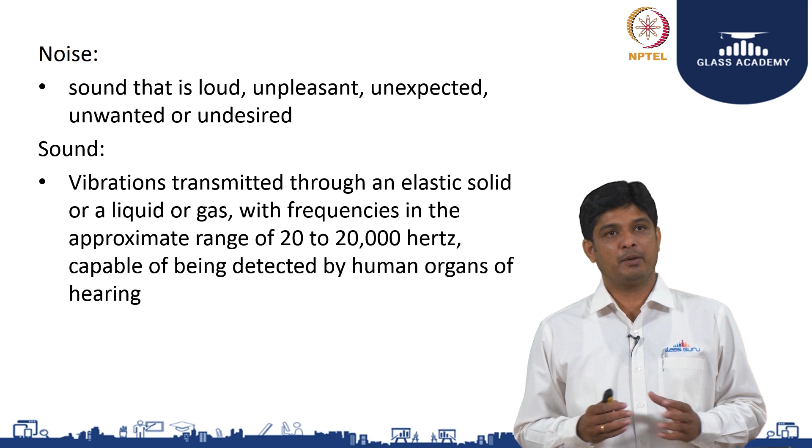What is noise? Sound that is loud, unpleasant, unexpected, unwanted or undesired, that is called noise. What is called sound? Vibrations that are transmitted through an elastic solid or a liquid or a gas with a frequency of approximate range 20 to 20,000 hertz and capable of being detected by human organs of hearing.

So, why decibel is a very important question to be understood, because our human ear is an amazing system. The threshold of hearing for a human ear is about 20 micropascal, whereas the threshold of pain is 20 Pascal. If you convert it to a frequency, 20 Pascal is approximately at 1000 hertz frequency.

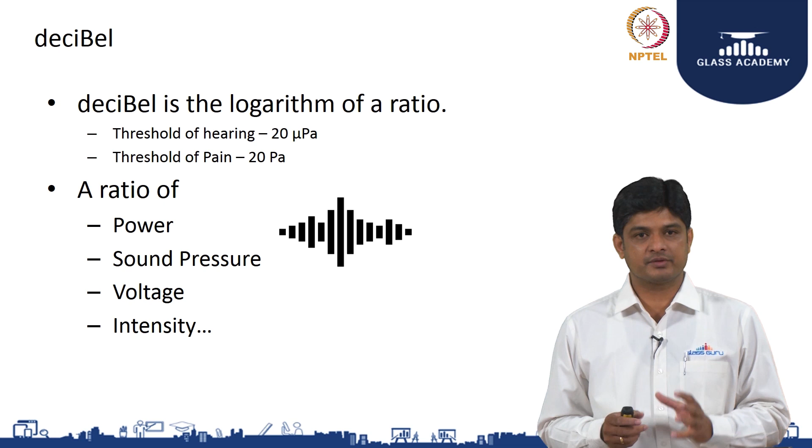What is called decibel? It is a ratio of the power, the frequency that is going to hit, the pressure, the intensity and the voltage. The ratio of all is measured by an individual number called decibel.

So, when you have a source, you have a huge range of intensity, which is the loudness, and there is a medium it is going to transfer through, and then there is a pitch, which is called the frequency pitch. There are low frequency and high frequency pitches which are going to reach you. So, this three combination is going to decide whether it is going to be a pleasant noise or a disturbance. So, there is a frequency difference when you see silent versus noisy; the way it reaches you with the intensity is going to have an impact on your ears.

Commonly, how much you can withstand, or where you can have what kind of level of noise: anywhere in a living space you can be at less than 40 dB, which includes your living and sleeping. Sleeping is usually suggested to be less than 35 dB. A working station or business office can be even up to 60 to 65 dB. Anything more than 80 dB you call a noisy environment, anything more than 100 plus will be really a disturbance, and more than 120 it can become unbearable.

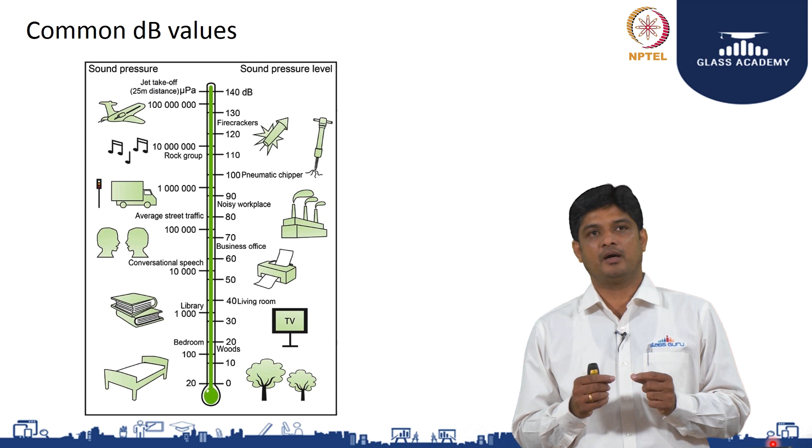That is where, if you connect it to my myth, even a 1 dB reduction at this scale is going to be a huge reduction, because after 40 to 45 dB, the impact of noise at every 1 dB will be double, which you cannot bear. So, the level of what is bearable versus not bearable is hardly 1 dB difference.

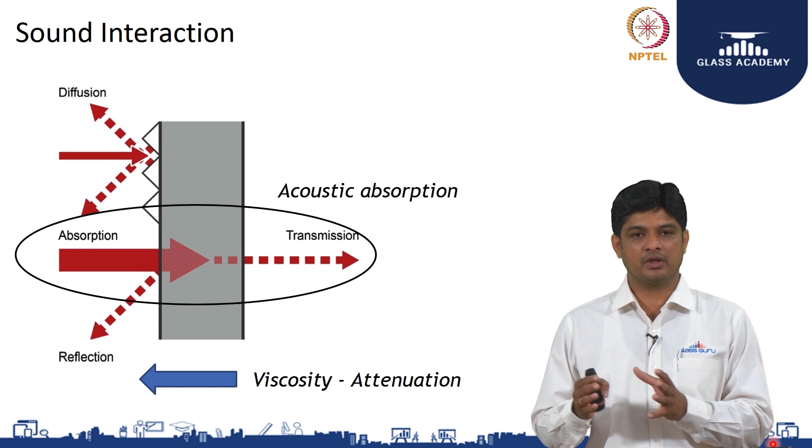So, how does the sound interact? The sound interacts when a source is going to hit an element or an object or a layer. So, part is going to get transferred, part is going to be reflected, part is going to get diffused, which is because of the surface of the medium it is going to hit, and all this can happen based on the mass of your material, because mass relates to the frequency filtration process. So, when you come to glass and acoustics, you have to be very clear on two important factors, which are called Rw and STC.

STC is called sound transmission class, whereas RW is called weighted sound reduction index. In both, when you want to measure and plot, both have a very similar methodology. The basic difference is the frequency range and the standard contour graph which we are going to plot. There is a difference in that. When you measure STC, you measure as per ASTM E413. When you go to RW, you measure as per ISO 717.

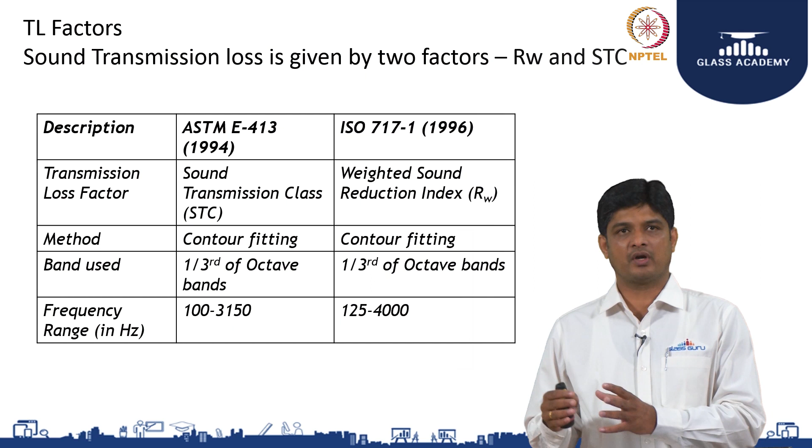Plus, the frequency range for STC is around 100 to 3150, whereas for RW it is about 125 to 4000 Hertz. What is called RW? It is a weighted sound reduction. It is a simple, single value index which is measured in decibels. As we understood, whatever we receive from the source to the observer side, we measure with a single value index called decibel.

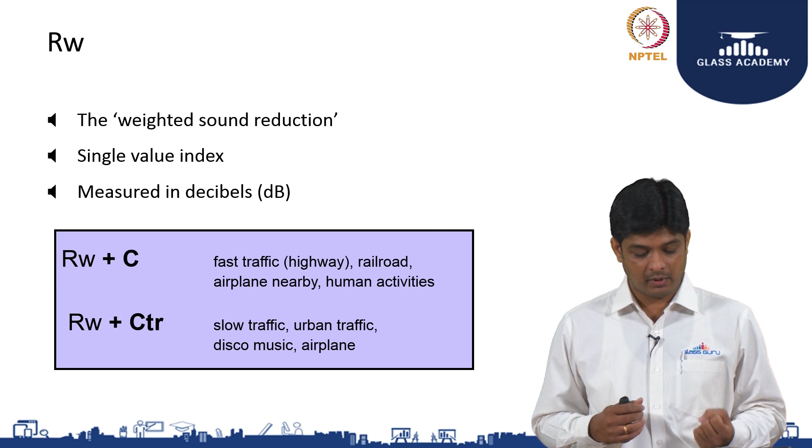In case of a building, when you have a value, whether it is RW or even an STC, specifically in case of an RW, we need to be very careful based on the type of source. Based on the type of source, you have to have adjustment factors, which are nothing but RW+C or RW+Ctr. C is an adjustment factor which relates to very fast high traffic, railways or airplanes, where the pitch is very high, whereas slow traffic, vehicle movement, general public disturbances or different music come under Ctr.

To make it clear, if you take ISO 717, it clearly gives a table of what adjustment factor you have to use to achieve your RW inside a building based on the type of source. For example, if children are playing outside, you have to take your RW value and apply your C adjustment factor to it. That will be your final achievable noise inside your building coming from the source.

So based on the different sources, whether it is children, domestic, discotheque music, different types of road traffic, slow or high, road or airways, or what kind of disturbance comes from an industry. So this is very important to understand. There is something called RW and there are adjustment factors called C and Ctr, which are very specific to internal application.

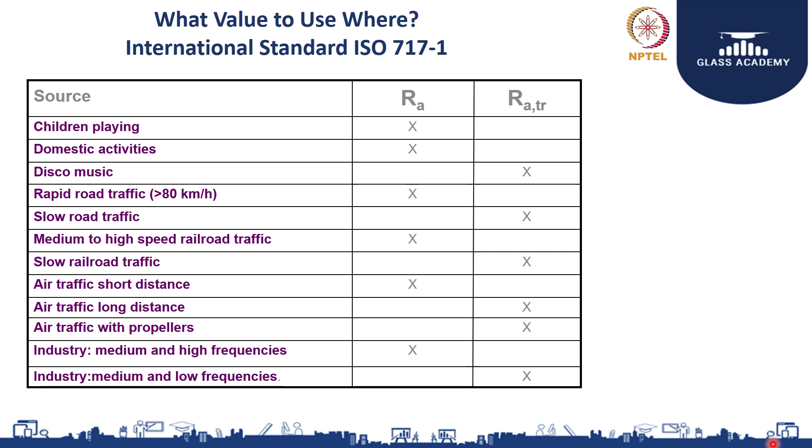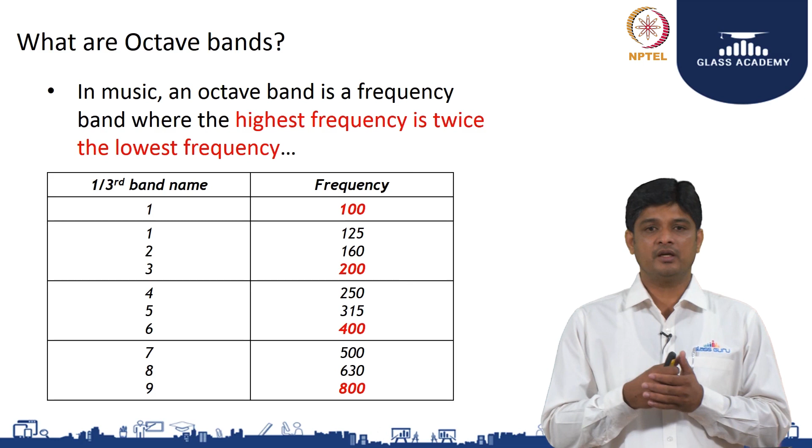To derive these graphs, first we need to understand what octave bands are. Octave bands means we need to understand the 1/3 values. You have to measure the impact of any barrier and plot it in this octave bandwidth, where the highest frequency is twice the lowest frequency. This is given in an ISO. So whenever you measure any material, you plot your graphs as per the 1/3 bandwidth, then align it to the standard contour graph to understand your STC or RW.

I will take you through how to calculate after you measure something, because measurement usually cannot be done at regular locations. You need a laboratory setup or a very specific setup to measure acoustics at different frequencies, say from 100 or 125 to 4000. Then you plot the complete graph and assign it to a contour. The measurement values are very important, because the human ear's frequency range is 20 to 20,000 hertz, but it becomes very critical at 500 to 8,000 hertz.

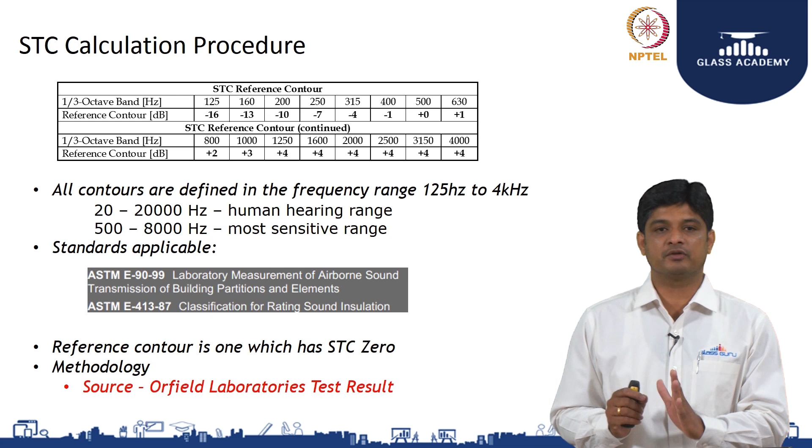So, the methodology to do this is, first I have to measure the transmission loss. So, I have a source, there are different frequencies being emitted, there is a barrier and there is a receiver. Based on the different frequencies measured, the transmission loss curve is plotted from, say, 125 to 3150 or even up to 4000 hertz. Once the transmission loss graph has been drawn, then I have to find my trial contour line; I have to fit the contour line into the graph.

How to fit? I have some basic methodology to be followed. Usually I have to start fitting the contour at 500, considering at 500 it is 0. So, when I plot it, because of the shape of the contour and because your transmission loss graph varies across frequencies, there will be ups and downs. So, there is a particular condition I have to achieve: the maximum deficiency, or the distance between the transmission loss curve and your contour line, cannot go beyond 8 dB.

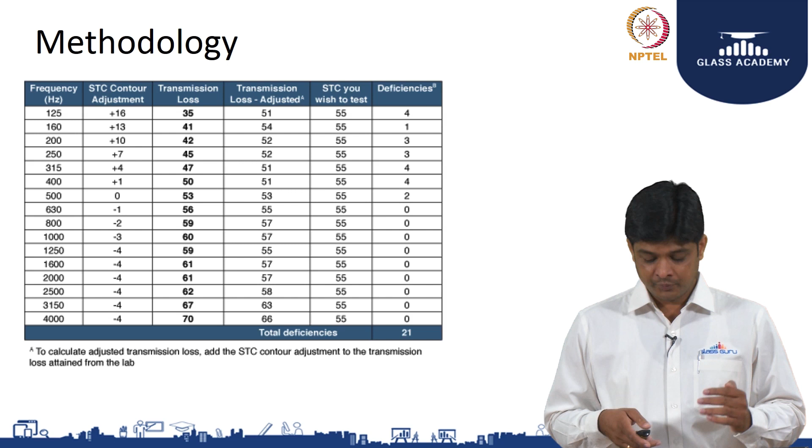So, when I plot this assuming it is 0 at 500, then I have both positive and negative deviations which I have to sum up. The second important parameter is that the total deficiency cannot be greater than 32. Even in this case, if you see, there is a plus 16. So, this contour line has to be further adjusted so that the maximum gap is 8 dB. When I plot considering these two criteria, I will be able to achieve the contour in my trial. Then whatever value is on my contour line at 500 hertz will be my STC or RW value.

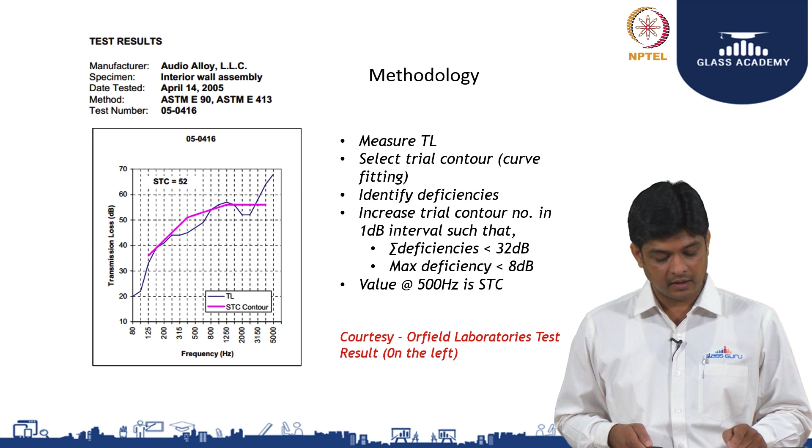So, to understand this with respect to glass, a normal float glass of different thicknesses, from 4 mm to 12 mm, as a single unit ranges from 29 to 37 dB. With every increase in glass thickness there will be an improvement in performance. The moment I laminate it, meaning I sandwich two glasses with a material called PVB or SentryGlas, based on the number of layers and type of bonding element, the range can be from 32 to 39 dB. In the same lamination combination, I can use an acoustic interlayer, which can further reduce noise transfer, improving from 32 to 36 and even up to 43 dB.

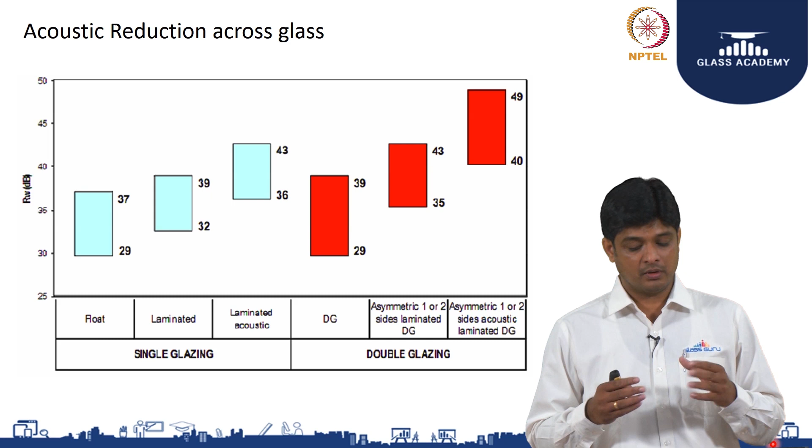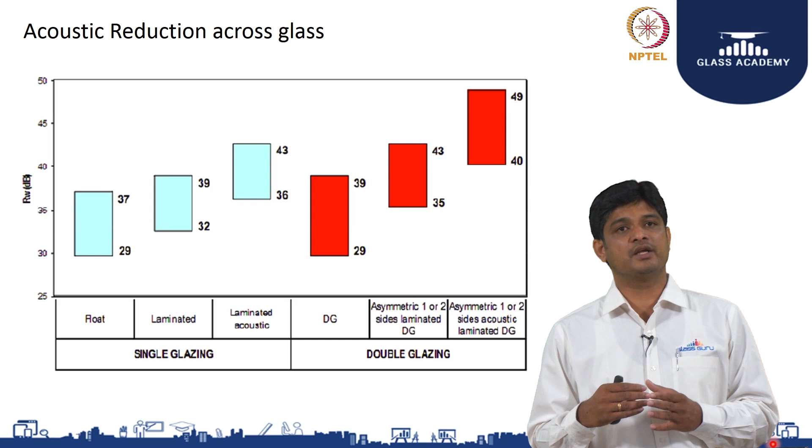If I have to further reduce the noise coming into my building from the source, the next option available is to make a double glazing unit. In the double glazing unit, I can go for symmetric or asymmetric glasses, where based on the thickness combination the reduction varies, or I can use a laminated glass in a double glazing format which can further increase my acoustic performance.

How is acoustic glass going to perform? It performs based on two important parameters. One is the thickness of the glass, which is a major factor. The second is the PVB, which behaves like a dampening material. There is another option called SentryGlas interlayer, which can further improve acoustic performance because of the stiffness of the material; the dampening property is further enhanced, which has a better impact on the overall acoustics.

So, to recap, we have gone through the basics of acoustics. It has to be measured in decibels, which is a single-number unit. It varies based on the type of test or the standard you refer to, whether it is as per ISO or as per ASTM.

So, there are two parameters called RW and STC. When you go very deep into it, the STC and RW range will be within a deviation of 1 to 2 dB; you can derive it. It is only a matter of the standard and the frequency you take. So, based on the source, again you have to use adjustment factors, which are called C and Ctr.

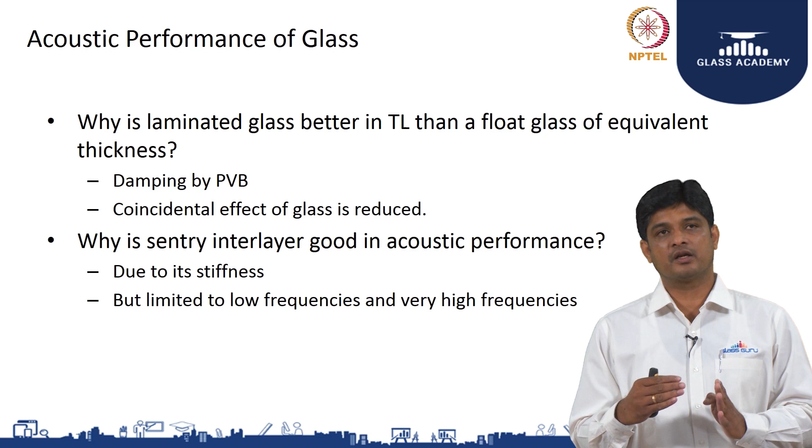The moment you are able to understand the basic terminology, then you should be able to understand how to plot it. So, to plot it, we need to plot first the transmission loss graph, then I have to plot a contour. The maximum difference between the contour and my transmission loss has to be 8 dB. After plotting it, I have to calculate the overall deficiency, which cannot go more than 32. So, once it is done, at 500, whatever is the contour, that will become my STC value.

So, specific to glass, thicker is better because it is heavy. So, there is less tendency to vibrate or to resonate. But in a single glazing, the maximum available will be 12 mm thick. In a single glaze, you can use it in an architectural application. So, the maximum you can achieve is about 36 dB to 37 dB. So, if you want to improve further, you have to go into a lamination format.

Again in lamination, as always, thicker is better, but here because of the benefit of the PVB or your SentryGlas, which behaves like an acoustic barrier, it helps you to decouple your individual glasses. So, there are 2 layers of glass and there is a PVB. It is suggested to always go with asymmetric glasses, because sound travels with a mass. So, every different mass behaves like a different filter. So, when you use asymmetric glasses, the frequency capacity to pass through will be varying.

So, when you use an asymmetric glass with a PVB, glass 1 is able to block a particular frequency, then the PVB, and then glass 2 will be able to block different frequencies. So, when you sum all of this, there will be a better reduction. Whereas, when you do a simple lamination, you can achieve a maximum of about 37 to 42 dB.

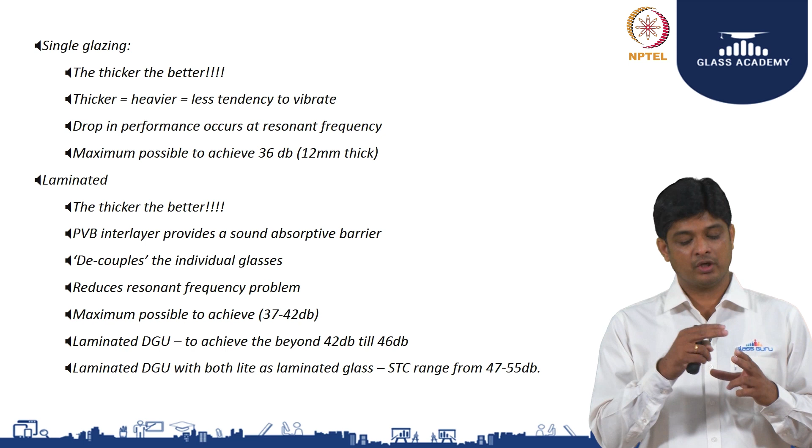Based on your source, you have to plot your graph, and based on your source, you have to understand your contour and then derive your STC considering your source and your adjustment factors. Once we are able to understand these 3 important parameters, your RW, your adjustment factors and your source, you can play well within acoustics.

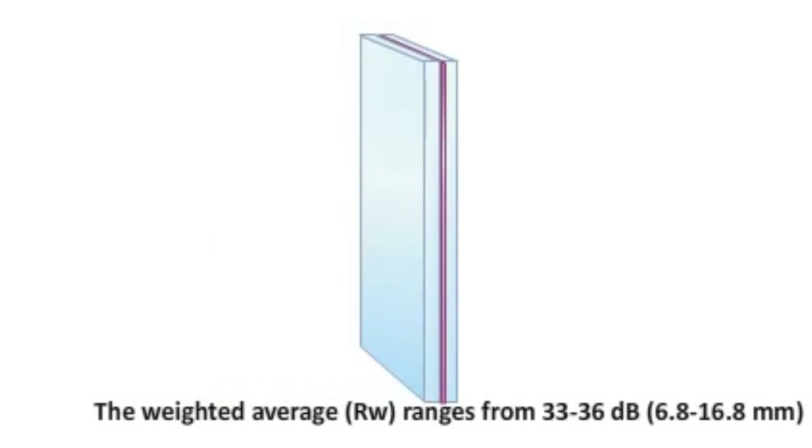Thank you. I hope this session will help you understand the very basics of acoustics, terminologies in acoustics, how to understand glass, and how to reduce the noise transferring into your building.